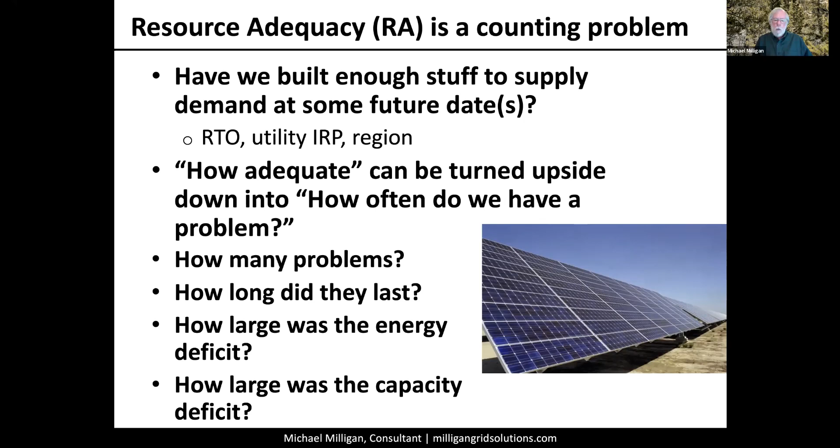So these are all questions that we can think about when we turn this reliability, this resource adequacy issue upside down. How many problems do we have? How frequent are they? And so forth.

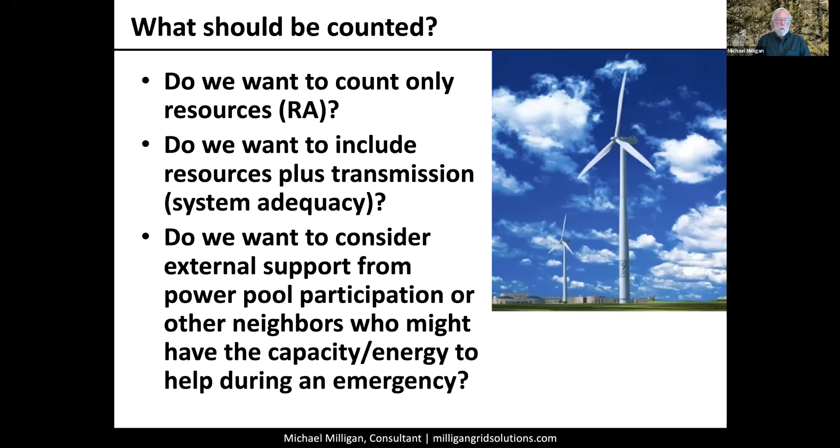There are some other questions that we have to ask ourselves when we're doing a resource adequacy analysis. Are we concerned only with resources, generation? You can put demand response or dispatchable demand in that. Do we want to include the resource base plus transmission? And if we do consider transmission, what about the neighbors that are potentially able to help us during an emergency?

And then we get into this is the policy question. So what is an acceptable resource adequacy target? Debbie mentioned the 1 day in 10 years, which is sort of the ubiquitous target. As I'm going to point out shortly, nobody really knows where that came from, but we use it anyway. It's a nice number.

But from a policy perspective, we need to ask how many loss of load events per year or per decade are acceptable. How long is too long for one of these events? And we haven't really thought through that, I think, carefully enough in the United States and probably around the world, because we're sort of stuck in the historical 1 day in 10 years or some variation of that. And I'm not saying 1 day in 10 years is wrong, but I don't think we've really done sufficient justification of that, or maybe there's a better one.

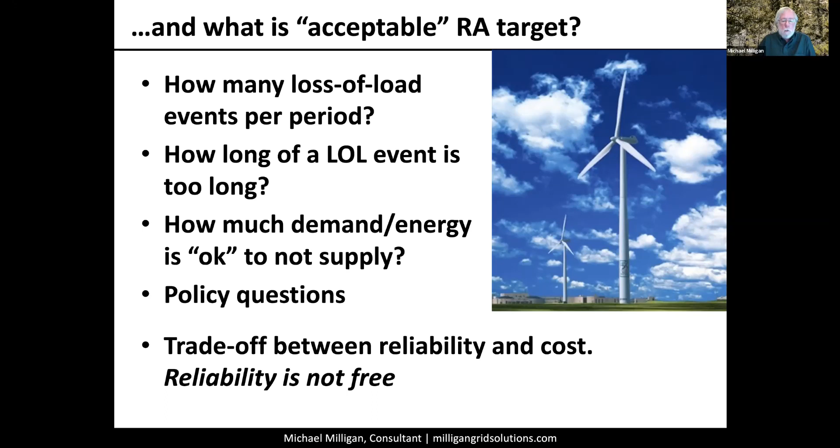And the bottom line here is that you can always get more reliability. You can always build more stuff, but of course that comes at a cost. And so reliability isn't free. And so when we think about how much reliability is enough, or again, flipping it upside down, how many problems are more or less acceptable, we have to recognize that there is this trade-off between reliability and cost. And that's why the resource adequacy target, whether it's 1 day in 10 or something else, is really a policy question. How much are we as consumers or as a society even willing to pay to have a reliable system, however we might want to define that.

So then we start asking these questions. Well, how reliable is reliable enough? This 1 day in 10 years target that is often used more or less translates to 99.97% of the time everything is okay, and that's pretty good. And that we often measure as a probability that demand will exceed supply. And of course, we need to think about how we're going to treat demand response when we do the math. That's doable, and we'll talk just briefly about that a little bit later.

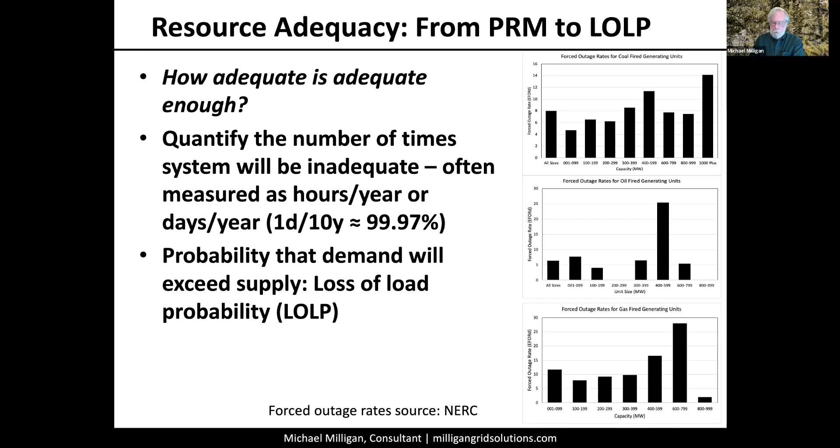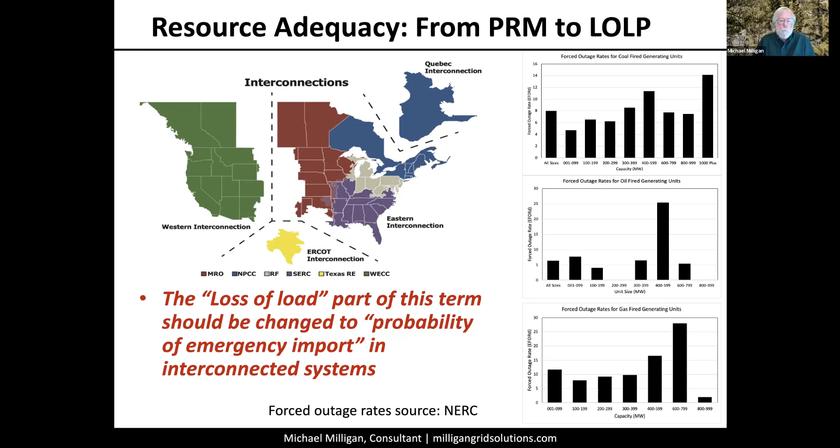But the point is that oftentimes, if we are in some sort of an emergency, we do have this large interconnected system, particularly in the East, but also in the West. And we can often draw upon neighboring systems to help out and deliver some emergency capacity and energy. And if that can happen, then we're not truly talking about load shedding or dropping load, we're talking about some sort of an emergency import from the neighbors. And how to quantify that is a difficult thing, and we'll talk just briefly about that a little bit later as well.

So this diagram is actually taken from a paper written in about 1950 that talks about the idea of using probabilistic analysis to start looking at resource adequacy. And this is important because this is kind of where the 1 day in 10 years target came from. Back in the 50s, actually some of the really early calculations, and this makes my head hurt to think about it, they're using desktop calculators.

So you imagine these giant sort of typewriter things with numeric keyboards, and it must have taken an army of people days to calculate a simple loss of load probability. So computation was really difficult. And then eventually people moved to punch cards on computer systems. And if you don't know what that is, you can probably look that up someplace. But the computing power was extremely limited.

And so what folks did was they said, we're going to take the peak demand from each day. So that's 1 hour per day. We're going to throw away all the weekends because demand on the weekend is generally a lot smaller than it is during the week. And we want to also eliminate weekday holidays.

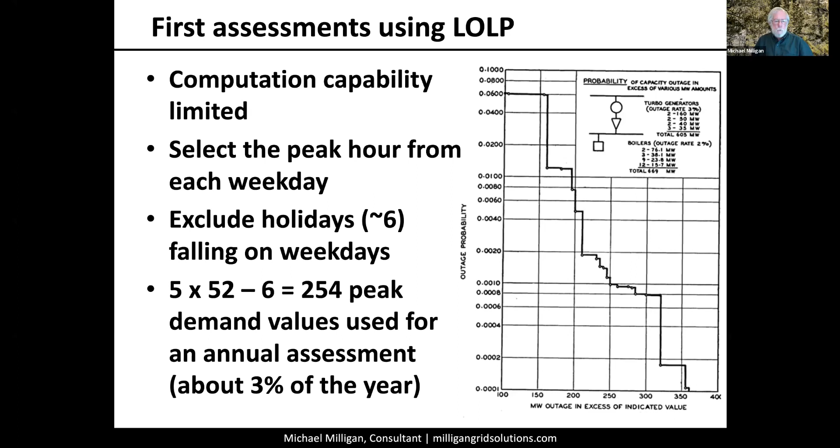So when you do the arithmetic associated with how many values per year, that works out to be around 250 demand values per year. And then we're going to use that to calculate a 1 day in 10 loss of load probability. So when you think about that, it's about 3% of all the data points in a year that we're going to use to try to figure out if we're adequate or not.

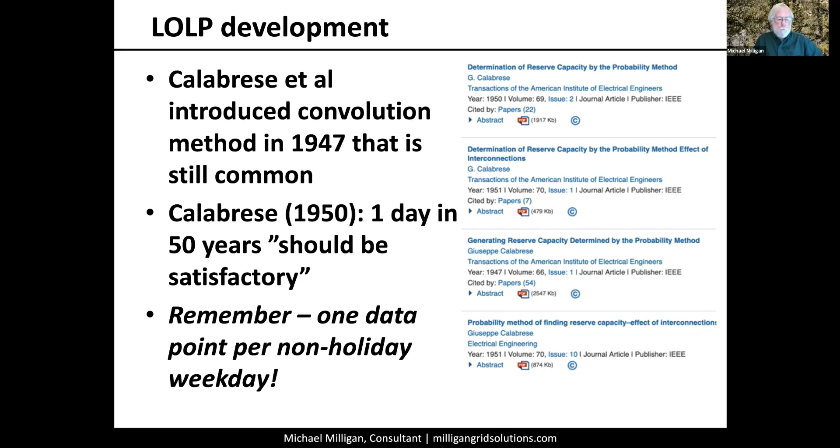This is some of the evidence, 1950, 1951, even back to 1947, when some of this work began. Back in the 1950 paper, Calabrese said, we don't really know what a target is, but 1 day in 50 years loss of load should be satisfactory. That's really reliable. There's nothing wrong with that, but I'm not sure we want to pay for that. But think about the fact that when he's doing that assessment, it's 1 data point per non-holiday weekday that's being utilized.

We have the same sort of terminology in the power system. A loss of load probability, strictly speaking, is between 0 and 1 inclusively, and a loss of load expectation is sort of like those 50 heads, that's the expected value of my loss of load. And we often express that in terms of days per year, 0.1 day per year, or 1 day in 10 years, or something like that.

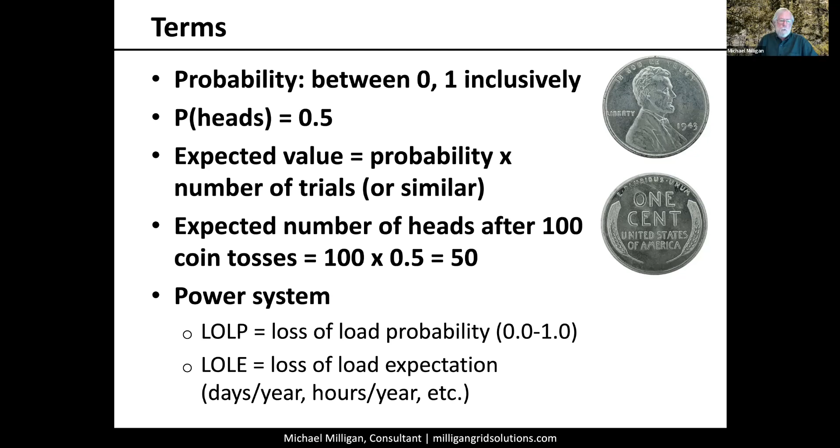There is a memorandum by a guy, I believe he was at GE, that came up with this analogy of rainfall and what's the probability of raining during the day and so forth. I won't go through that, but this is really some of the first evidence that people started thinking about a 1 day in 10 years loss of load probability.

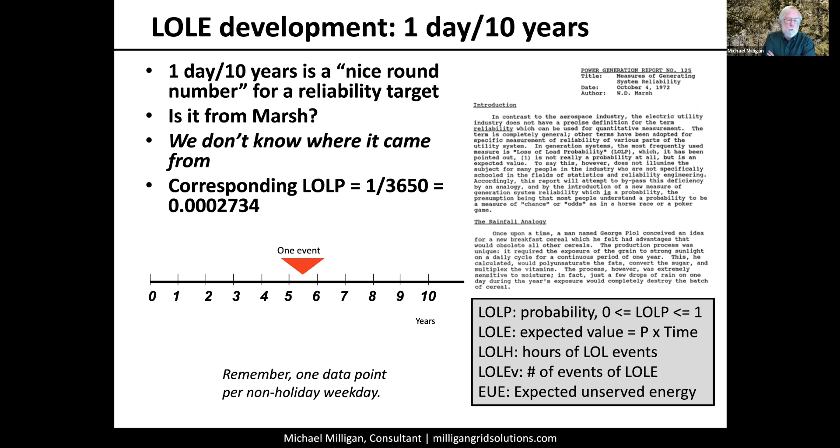So renewables come along and things change significantly. Back in the old days, before renewables, most of the loss of load risk was during the peak or the near peak times. With renewables, we have shifting risk periods. We also want to think a little bit more about those other 23 hours of the day and those other 300 and some odd days of the year that we ignored when we looked at non-holiday weekdays only.

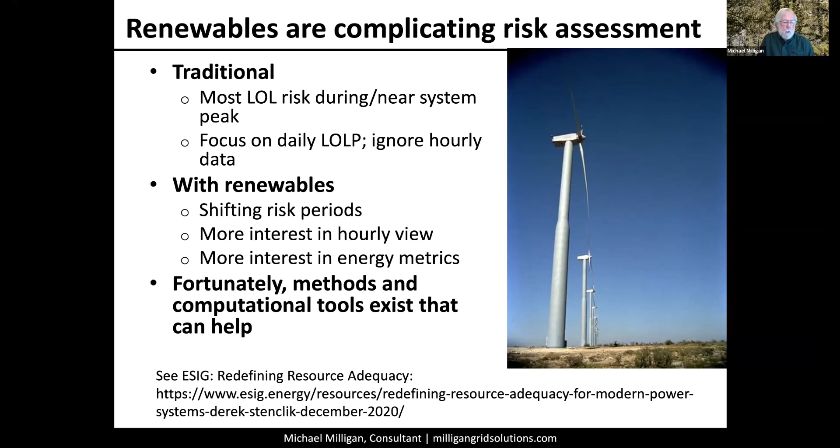We do have a lot of tools that can help. And Derek, a little bit later, is going to be talking about ESIG's redefining resource adequacy. But as we start thinking about renewables, we want to know how they contribute towards a reliable power system. Now, this measure, you may have heard of effective load carrying capability. I want to point out that this actually came about in the 1950s and 1960s, long before anybody was taking wind or solar seriously.

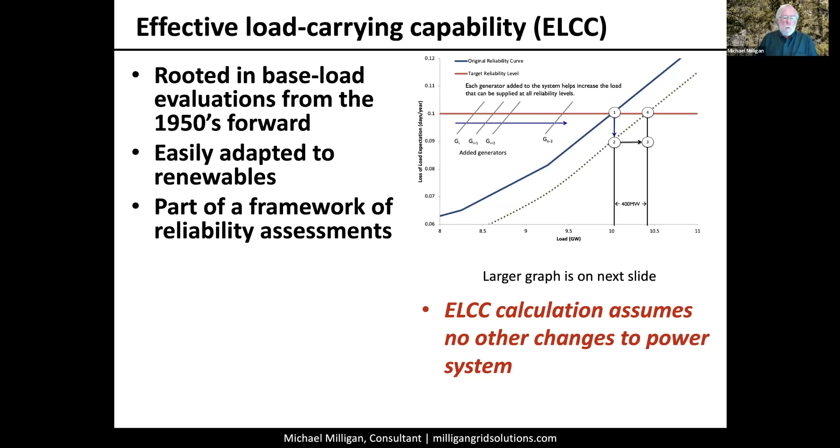You often hear folks today in the power system industry saying, well, we've got all these things we're going to do for thermal units, but here's wind and solar, they're special. We're going to use ELCC for wind and solar. That doesn't make sense, because in fact, ELCC was really developed for baseload resources. And we have adapted that to renewable resources. And I'll just take a minute to go through this.

If we have a reliability target as represented by this red line, 0.1 days per year, we have a bunch of generators. We build out the system, and you can see the gray lines moving to the right. If we're at 0.1, we've met our reliability target at a demand of around 10 gigawatts of load. But now if I add a new generator into the system, this whole blue reliability curve shifts to the right. What we want to do is measure the horizontal difference between 1 and 4. That tells me how much additional demand, 400 in this example, I can meet at the same level of reliability. We call that effective load carrying capability.

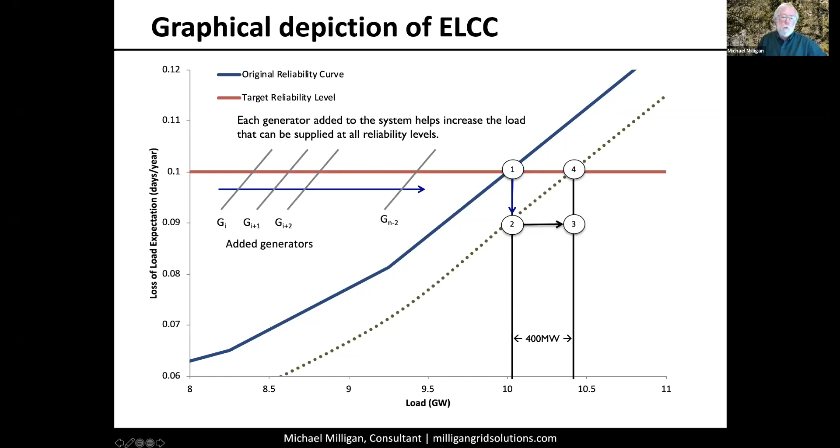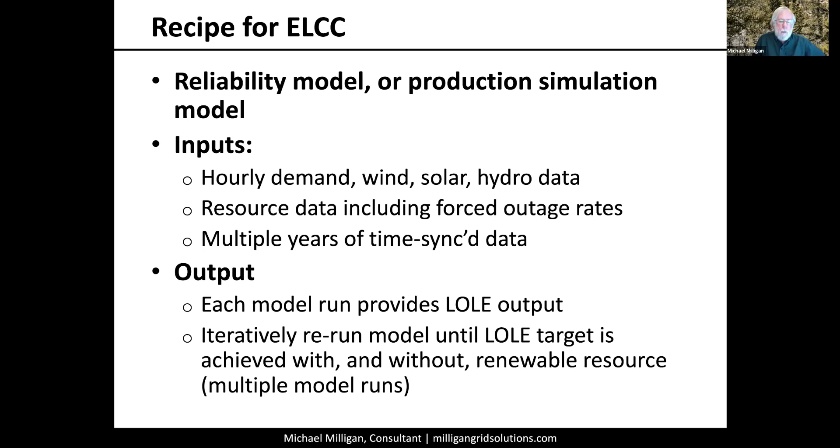You'll often see folks talking about wind ELCC or solar ELCC. This is what it is. To calculate ELCC, you need a reliability model or some sort of production simulation model. You need hourly demand, wind, solar and hydro data, and the forced outage rates I mentioned earlier. I would have multiple years of time-synchronized data. Because weather drives demand, wind, solar and hydro, we want to make sure the data is all consistent. So we run the LOLE model a number of times, and that gives us the LOLE for the system, but also the effective load carrying capability for wind, solar, hydro, or whatever resource we're looking at.

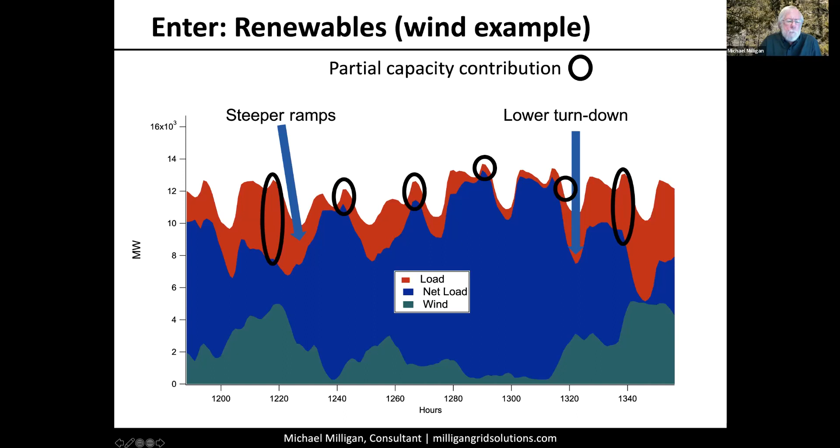So you can take a look and ask, what's its contribution to the peak demands for this week? From this example, we can see that it's kind of all over the place, and that tells us the risk profile is going to be changing. Where we're having loss of load events or probabilities used to be right around those top red peaks, but now it may be around some of these blue peaks. And then when we add solar in, it gets even more complicated.

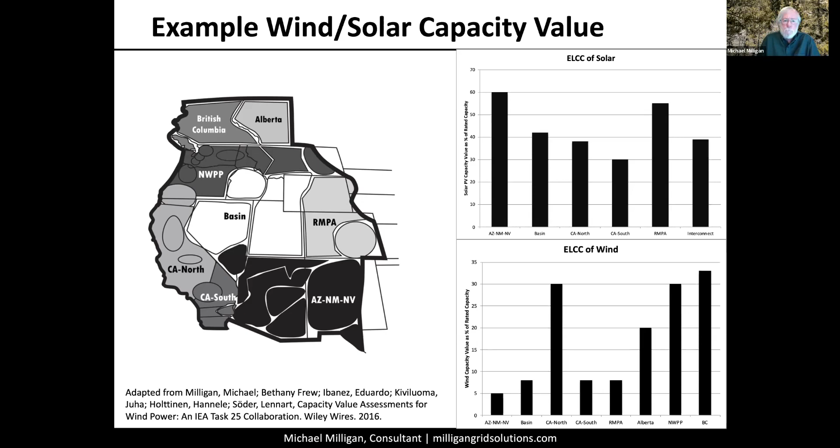Wind and solar capacity value, ELCC, depends on a whole bunch of things. There's been a lot of attention lately given to the impact of the penetration rate on capacity value.

So Debbie showed the sort of ubiquitous duck curve a little while ago. The more solar you have on the system, the less other stuff you need in the middle of the day. And so that shifts the risk. So we can see here that the capacity value of PV, the energy value of PV, it all tends

to drop as the penetration goes up. But there are a lot of other things that the capacity value depends on. The capacity value will depend on forced outage rates of your other resources, gas, coal, whatever else you've got. It'll depend heavily on the storage that you have and how you're operating the storage.

That includes pump storage. Maintenance schedules can play havoc with not only ELCC, but also risk profiles. Think about back in the old days before a lot of wind and solar, October might have been a good time to do a whole bunch of scheduled maintenance on your thermal units. And so, if everybody goes out and does maintenance and you don't have much wind or solar in that month, you could run into some trouble.

Imports and exports drive this, as do hydro generation patterns. So when you do an ELCC study for any resource, PV, wind, it depends upon everything else in the system being held constant. And we know that isn't really true. So I think there are some shortcomings, and Derek may be talking about some of this with respect to how we look at ELCC in the future.

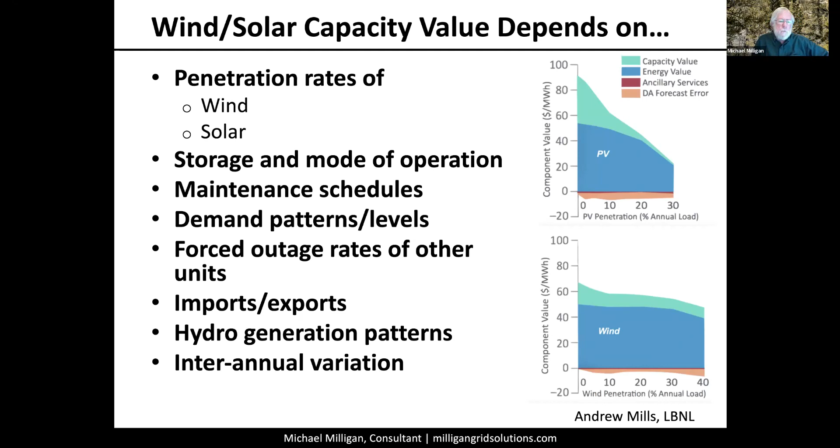Storage and demand response have a big impact, and no surprise here, the effective capability of storage also declines as you get more of it. And the same thing is true with demand response. But we do know how to do the math for this now, and I think as we see increasing levels of storage coming on the system and demand response, and of course solar and wind, we need to be really careful about how we treat all of these in the calculation.

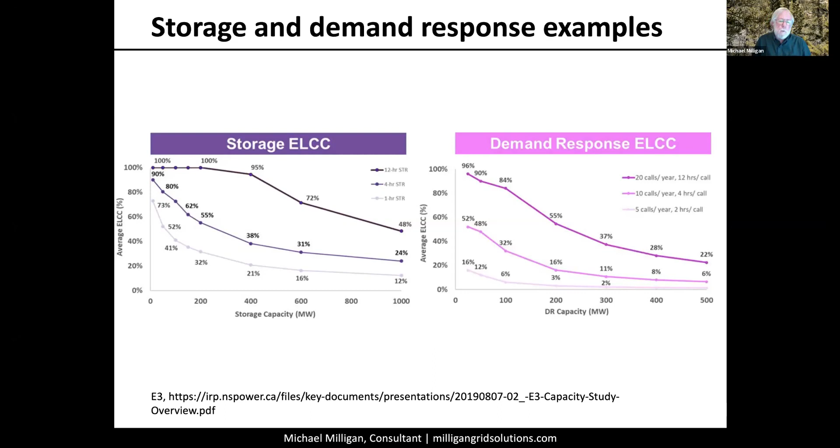There's an emerging interest in this so-called portfolio effect, and the idea behind this is that we know the capacity credit drops. This particular graph is PV from some work that Andrew Mills and Wiser did almost 10 years ago now. But what this shows is a number of different studies that you can see here in the color coding legend. And as I pointed out earlier, all plants are a little different, but you do see this characteristic of a declining capacity value for PV as you add more and more PV to the system.

This portfolio effect is sort of the idea of saying, well, rather than looking at this as each individual PV resource, whether it's utility scale or perhaps even distributed, think about how the overall portfolio of solar contributes. E3, the consulting company in California, has been doing some thinking about this, and others have been thinking about this too, to try to get away from strictly the ELCC of the last plant that you build, and instead talk about the ELCC of the solar portfolio. You can see that the first-in contributions give a big number, the last-in contributions a low number, but the solar collectively is doing a lot to help with reliability of the system.

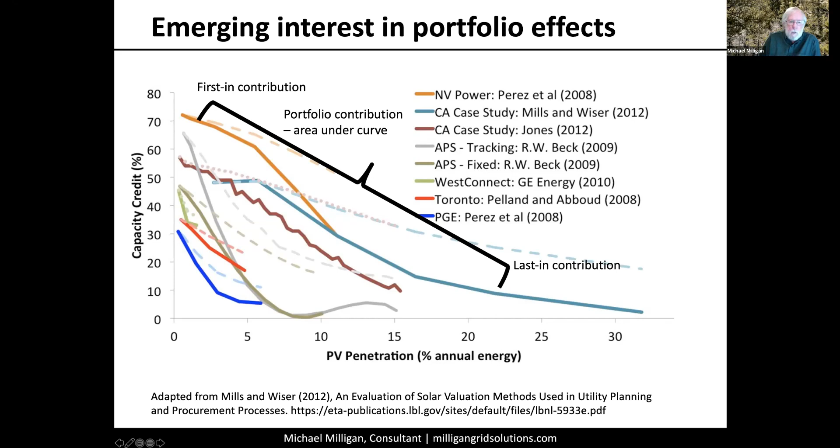The other interesting thing that happens with ELCC is that you can get what we call a diversity benefit. E3 also talks about this, and I think it's a really important point that if you look at wind by itself or storage by itself or solar by itself, you get different ELCC values. So there is this diversity benefit that we need to be capturing when we look at the overall system.

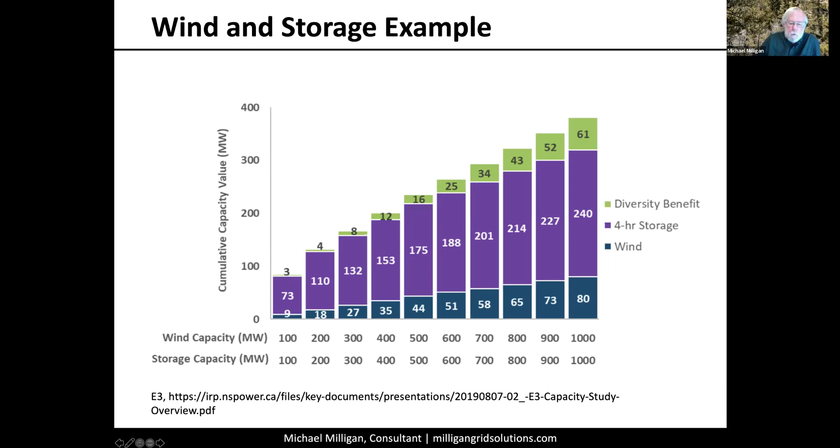Wind and storage together, I won't spend a lot of time on this one, but this shows some of the differences that you get in the capacity contribution of wind by itself. I think my slide may be mislabeled there, but no, sorry, wind and storage, and the diversity benefit that can be calculated from a model such as some of the ones that E3 uses. One of the biggest issues in my mind is weather, and of course this is, we're all thinking about what happened in Texas and the Southeast and even a little bit north of there in February.

How does weather affect renewable energy? We know it affects it a lot. When we see a map like this on the west, we have an extended Pacific jet stream. It's low in the wintertime and brings down warmer weather. That can also cause a relative lack of wind in the upper Great Plains, Minnesota, Dakotas, and so forth. So you want to take that into account when you're doing your planning.

The bottom left two graphs show that in 1996 and 1997, the jet stream actually split. Part of it went where you see this orange track, and the other part went north of the Dakotas into Canada. That created basically a wind drought in Minnesota, Wisconsin, and the Dakotas.

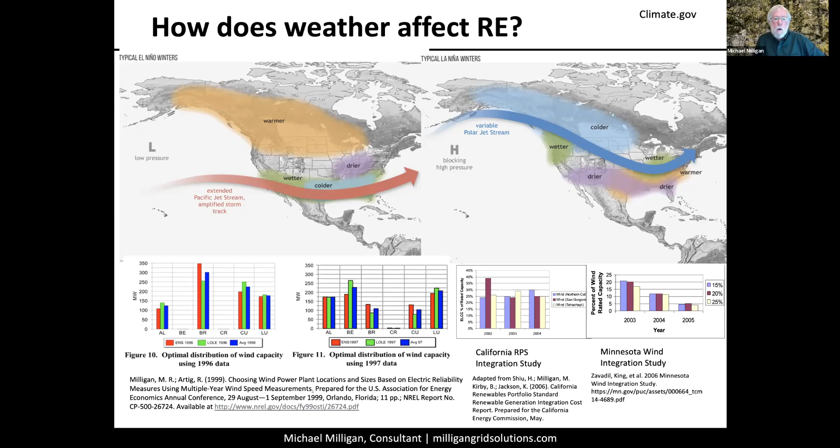But depending upon what's happening with El Nino, La Nina, the jet stream, over on the right you can see colder, wetter weather, which generally brings the wind, and of course you generally get less solar. So we need to really be careful about how we address weather as we go forward.

I think that's one of the real weak links. It's not a weak link in LOLE analysis, really—it's really the data itself that is more the issue. So that takes us all the way back to the beginning: what is an appropriate reliability or resource adequacy target?

There isn't any particular justification for 1 day in 10 years. We've been using it for a long time. It's a nice number, but it doesn't really give us very much information that's useful in terms of the length of the outage, the depth of the outage, how much capacity.

We need to be careful about how we treat imports from the neighbors during emergency events. When you think about 1 day in 10 years, the way we've historically measured it, there's really no difference between a 10,000 megawatt outage for 23.5 hours and a 100 megawatt outage for 1 hour. And clearly we would like to differentiate between those.

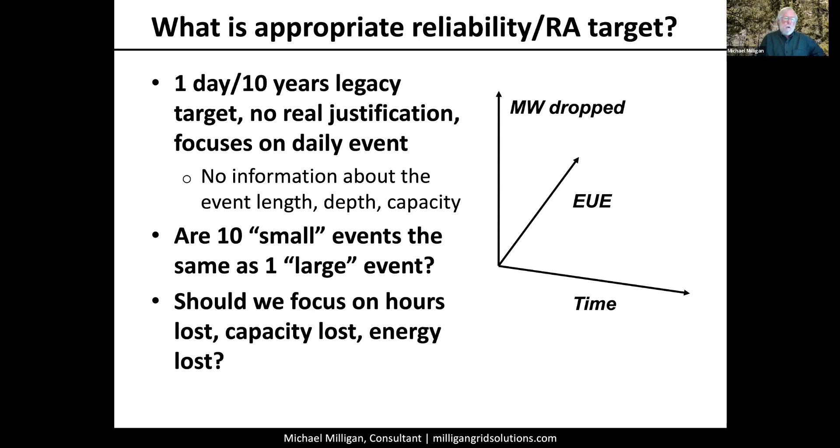I think a lot of work needs to be done to try to figure out at the policy level, what is it that we want? What are the acceptable targets? What are people willing and able to pay for? And how do we roll that into resource adequacy calculations?

Transmission adds another whole level of complexity to the issue. On the left is a graph I adapted from work we did at NREL a long time ago, the Eastern Wind Integration and Transmission Study. There are a bunch of different scenarios, but if you look at the left-hand two bars, there's a brown bar—that was the wind ELCC, just over 15%.

We rolled this analysis into MISO's transmission expansion planning, and when you applied the transmission expansion plan, the wind ELCC, same amount of wind, same place, went from around 15% to 26, 27%. You see the same pattern occurring throughout all those scenarios.

What that means is that transmission can actually help with not only integrating wind, but on the right-hand side we did some follow-on work at NREL to ask: in the Western interconnection, could you actually reduce building a bunch of capacity if you had a better transmission system? And the answer is yes, you can.

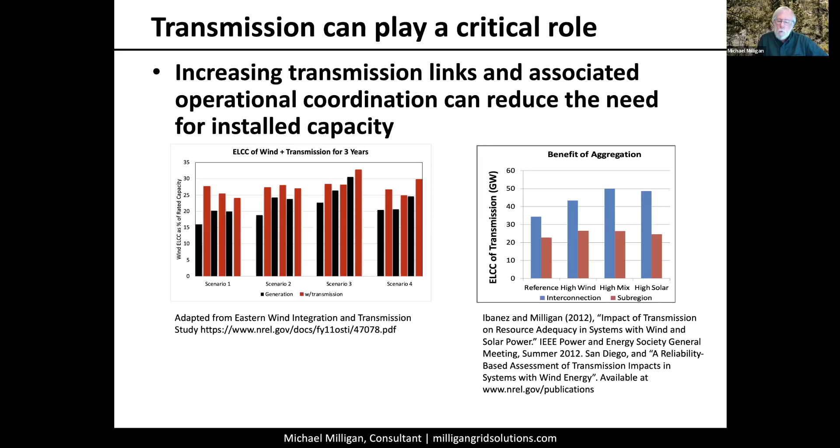This graph shows for different levels of wind and solar mixes, different levels of aggregation. In the maximum case, with a lot of wind and a lot of solar, we could reduce capacity in the West by around 50 gigawatts if we had a perfect transmission system. Now, I'm not going to argue we're ever going to get anywhere near perfect, but this shows that intelligent transmission design can actually result in building less resources, whether you're building wind, solar, batteries, gas, or anything else. So what do we have to do?

We've got to integrate resource planning, transmission, and distribution planning—I'll go through each of these in a little more detail in a moment. We need to focus on energy-first planning. We need to think a lot more about long-term weather impacts. We need to rethink our metrics and our targets: what is it that we really want out of the power system design? We need to make sure we can incorporate dispatchable demand or DR and storage. And we need to close the gap between what we know how to model today and our decision-making processes.

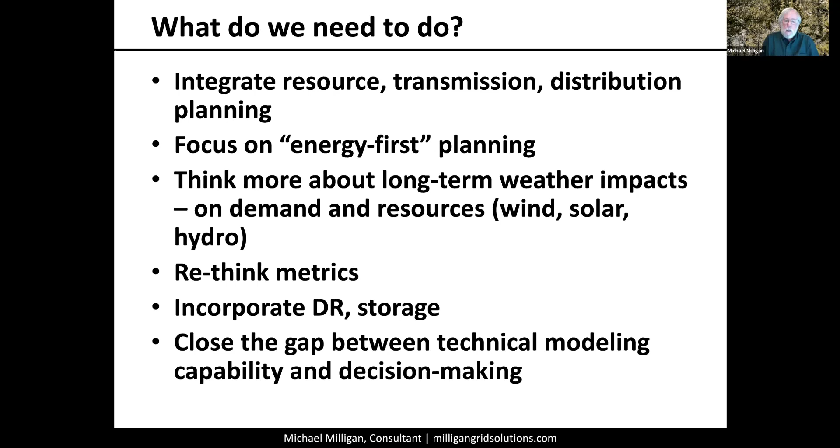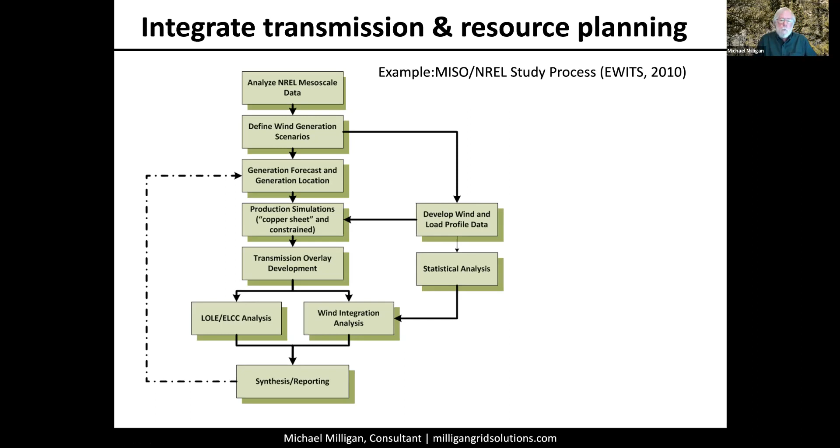Incorporating transmission into resource planning is not simple. I won't go through the gory details of this flow chart, but the basic idea is that when you build transmission, that affects power flows, and you need to look at whether you need to change something on the transmission system. Adding new transmission changes where things flow, which may mean you don't need to build as much generation. So you've got an iteration: build transmission, take out generation, build generation, build or take out some transmission. A flow chart like this can help inform this joint planning of transmission and resources. But that doesn't go far enough either.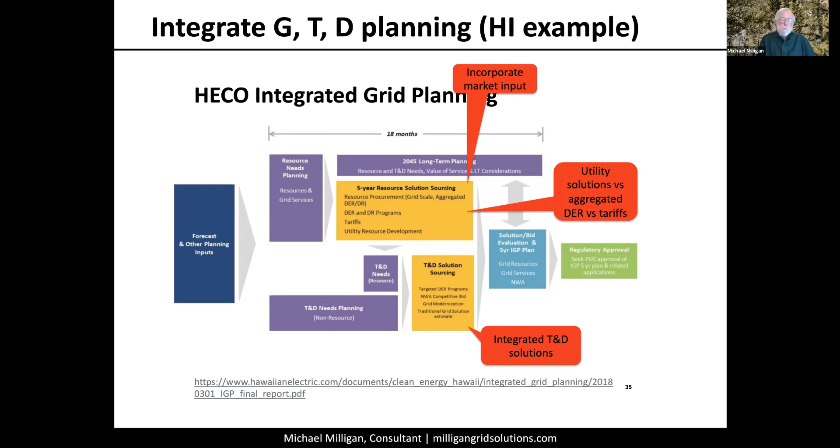We also need to take into account distributed resources. We see this huge increase in rooftop PV in the United States, and we're going to be seeing more batteries that go along with that. That really should be part of our system planning. As hard as that is to do, we need to start figuring out ways to do it. Hawaii is figuring it out. It's a small, unique system, but I think we can learn some things from what's being done there.

Transmission planning is a huge challenge. If you build transmission incrementally, saying 'next year I need this transmission,' assuming you can build it, let's build this 138 kV line from A to B. Well, five years from now, that line's too small, and then you're going back to reconductor it for higher capacity. We want to avoid that, yet size our transmission appropriately so it also works in the long term. Texas has had the competitive renewable energy zone process for a long time. It seems to be working reasonably well. It's not perfect, but it's an idea of being proactive about where and how we build transmission.

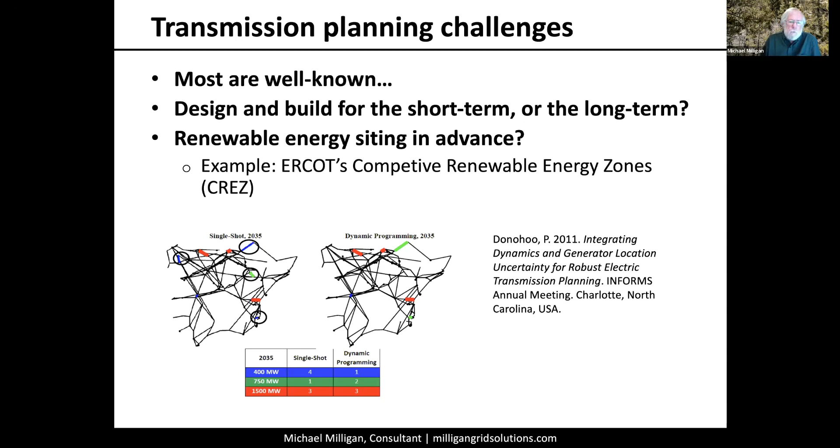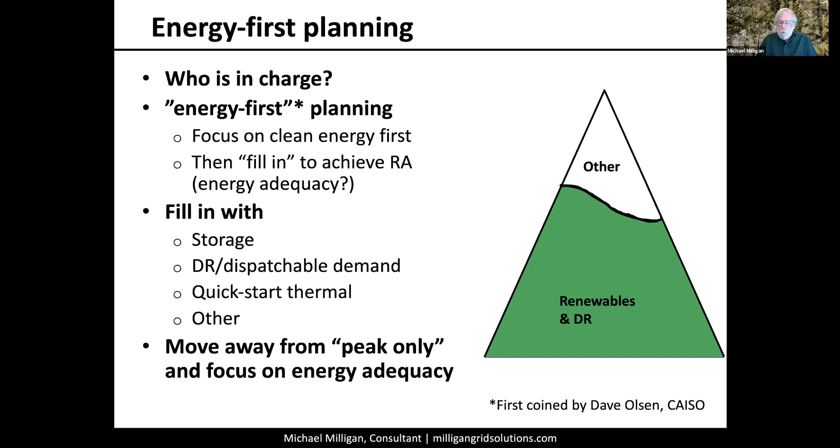Energy-first planning is this idea of turning the tables. Instead of thinking about capacity first, we think more about energy. Hypothetically, think of a triangle as all of our energy needs. Capacity is sort of buried in there, but fill up the triangle to the extent you can with renewables and dispatchable demand, then figure out what else you need around that. Is it storage? Is it more DR? Is it quick start thermal? What is it that we need to put in that other triangle? We can start by looking at our renewables to figure out what they're going to do based on your state's goals and region's goals and so forth.

Weather. It's the meteorology. I won't go through all of this, but you can meditate on this slide, and it's probably obvious that weather drives everything we do in the power system. It's driving demand, it can drive resource outages. It certainly drove a lot of interesting things in Texas a couple of months ago. But even without extreme weather, NOAA just recently released the new normal, the new temperature norms, which are a couple of degrees higher than they've been over the last period of time. So now when you say the temperature is higher than normal, normal is also higher than normal.

We need to really capture that a lot more robustly in our planning. You've got a weather year that's so above average or so cold. We do a lot of utility planning based on a representative weather year, maybe not an average weather year, but a representative year. But what about the representative years that start looking at unusual representative heat waves, representative cold waves? We need to do a much better job of capturing that in our planning.

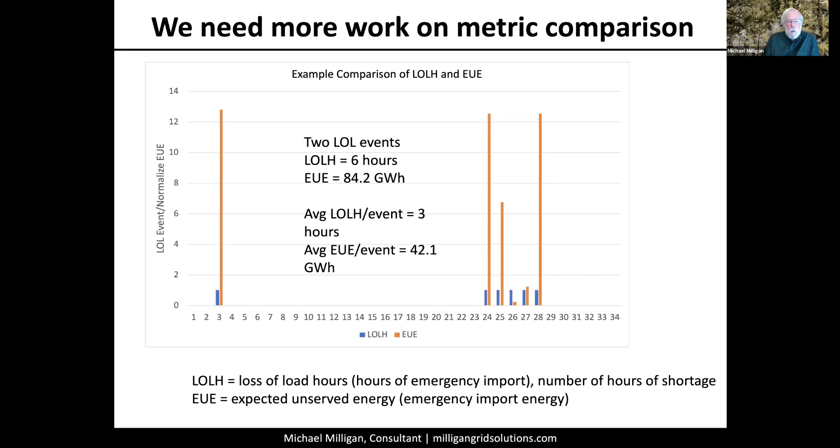We need a lot more work on metrics. I've got this simple example of two different events. Each counts as a loss of load event, but they have different energy, different amounts of energy spilled, different levels of hours. But if you're doing a simple one-day-in-ten-year metric, they both get counted in kind of the same way. So we need to be a lot smarter about how we do some of that stuff.

There's lots of metrics, and this is just off the top of my head, so to speak. We have models that can calculate loss of load hours, how many hours you've got a problem. We can calculate the loss of load expectation. We can measure it in days. We can measure it in hours.

Something else, perhaps, we can count the number of events. We can keep track of the average length of the event, the maximum length of the event. We can calculate the expected unserved energy by event, average by hour. All of that stuff, most models can calculate pretty well.

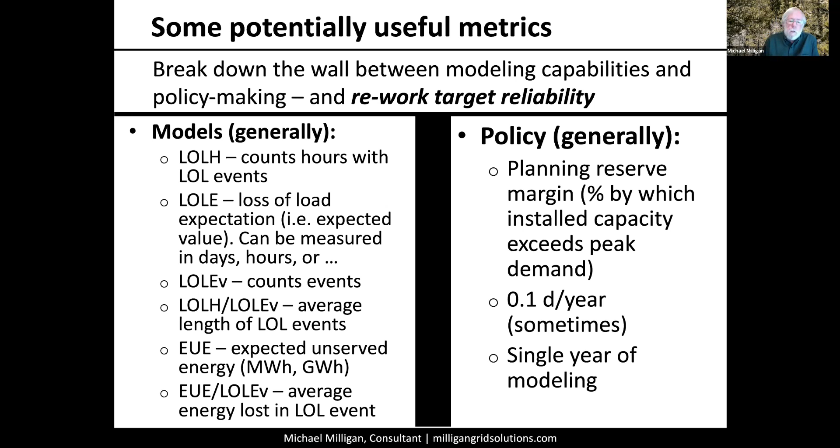Policy, we're stuck either in a planning reserve margin mode, or sometimes we have a 0.1 day per year, or 1 day in 10 years, LOLE. We often use a single year of modeling, single year of weather. Maybe that's been okay up to now. I'm not sure it has been, but we really need to break down this big black wall I have between the models and policy. But there's a lot of thinking and policy making that really needs to go into this.

I've got just a couple of minutes left. I want to walk you through this animation that hopefully is going to work here in a moment. This is an example of using demand response to provide regulating service.

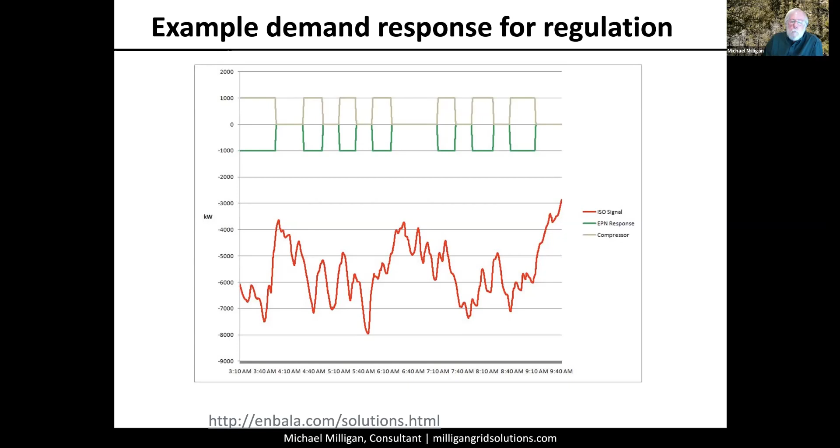And up at the top, what we're going to be seeing in the animation in a moment is we're going to step through a bunch of discrete resources that can be added - demand response resources, compressors, pumps, and so forth. Each of those devices will interact like a block. You can see this green off-on block, and this sort of tan off-on block. So each individual resource is going to behave like a kind of block. But we're going to assemble all of these together so that we can get really close to that red line.

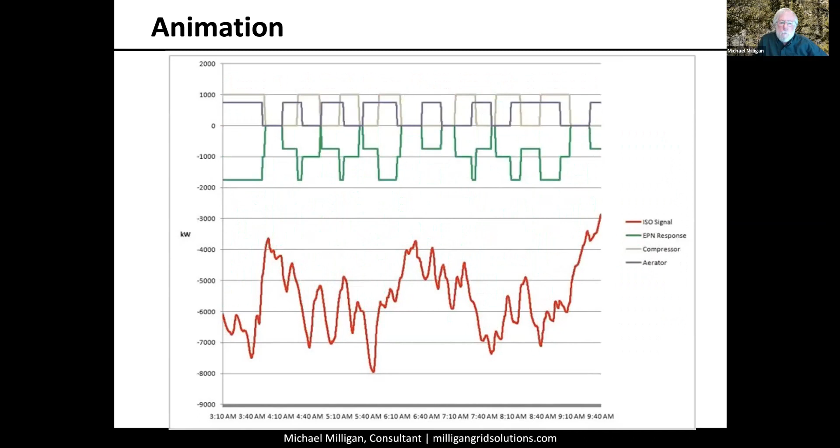So here's the animation, and it's just going to keep running here. I know you can't see all the gory details, but we're adding these various devices one at a time in that blocky fashion, and eventually we get awfully close to the AGC signal.

Now why do I show this? We could do a lot with demand response that we haven't yet done. The example I showed you is regulation. We need more than just regulation from demand response, but what that example shows is that not every resource has to do everything. You can have a bunch of blocky response from a bunch of resources, and you can compile those together in such a way that you can get a lot of interesting shapes. And of course, the shape of interest is really that net demand, that net load after we count for wind and solar. So the question is, how many ways can we mix and match various demand response capabilities in a way that can help us with the system?

So what we really have to do is close this gap here between modeling and decision making. The models can do lots of metrics, but the models don't know what's a sufficient level of reliability. That's where we need to come at this from a decision maker and a policy point of view. We need to get a lot smarter about that. We need to take multiple years into account.

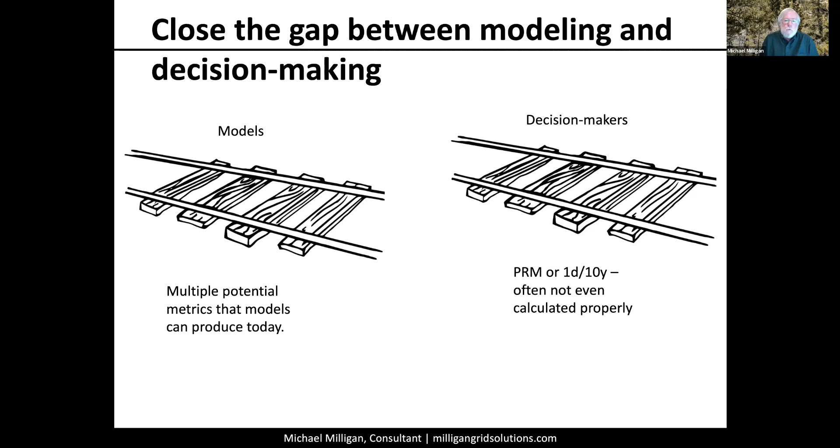I'd like to close with some optimism. Not just me, but across all of the brains in this industry and the models in this industry, we've got a lot of what we need already, but we need to apply it, and we need some guidance to figure out what sort of reliability targets do make sense. We need to...

Develop a common framework - I'm not sure if I mentioned this, I should have. This whole loss of load probability and ELCC, it's not just a metric, and it's not just a formula, it's a framework. It's like an insurance company figures out risk, and we need to figure out risk in the power system. We need this framework, and maybe LOLE, LOLP isn't the right framework. I think it is, but we need to be able to push that forward so that it's changing, and we can change it in a way that we can get what we need out of the power system.

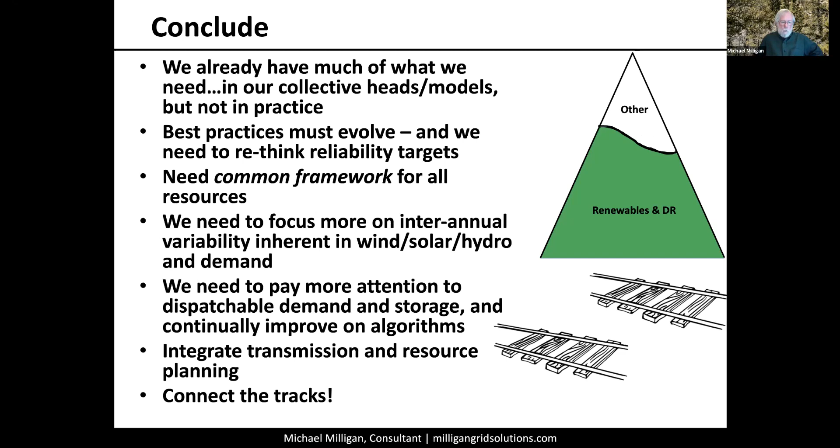We need to connect the tracks, and I think with that, I'm finished.